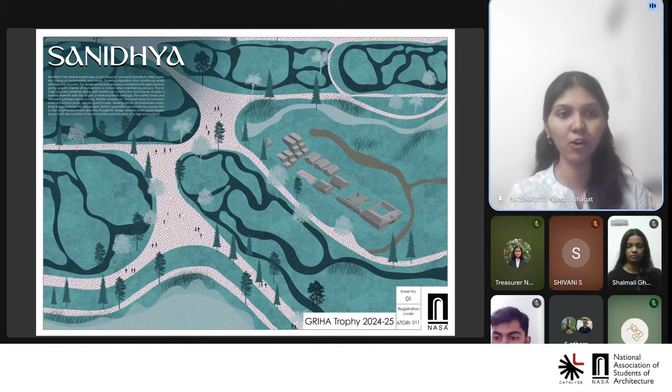The first sheet sets the foundation of our design, speaking about climate, users, urban context, demographics, and local culture. Studying these points from official websites helped us design directly from data and not from assumptions.

Finally, the form development was inspired by the Warli design. The circles were a conscious design solution to reflect togerthness, local identity, and social interaction, rather than simply keeping it as an isolated resort experience.

Thank you, Nandini, for a wonderful introduction. So as we have seen, we developed our plan form through the Warli art.

In the brief they mentioned drywall construction while developing the concept. So our concept is rooted in the philosophy of Panchabhoota, where harmony is achieved through the five elements of nature - earth through sustainable local materials, water and fire through moisture and fire resistant treatments, air through light structure, and space through open layouts.

Looking at our site plan, we divided it into three zones - public, private, and semi-private areas - and worked on the program according to GRIHA criteria, taking into consideration the bylaws and guidelines of the resort. We looked at the population density as per GRIHA criteria and took that into account in deciding the number of cottages, and for local improvement we created recreational spaces along with services provided in the admin area.

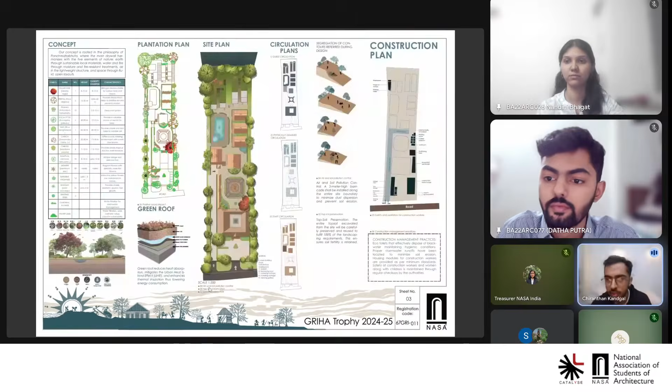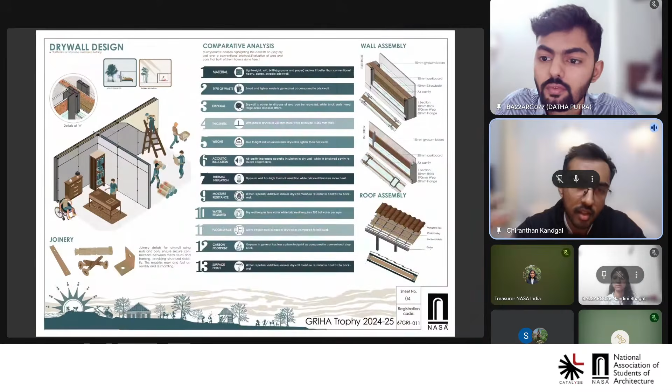Good evening everyone. As Datha mentioned, one of our core principles in this brief was to incorporate drywall in our design. So we started off by noting down the structural and non-structural components inside the building where we could use different types of drywall and their joineries.

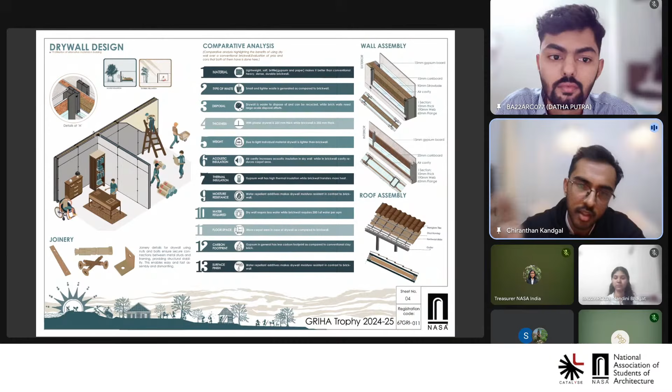We also started with shortlisting materials and how we could incorporate them in these joineries. Our approach was to perform sketches and models through which we could accurately demonstrate how each of those materials and components would sit with each other.

Through this process, we performed many experimental models, and finally decided on this wall assembly based on criteria like material, the type of waste it generates, the thickness, the weight, and the thermal insulation.

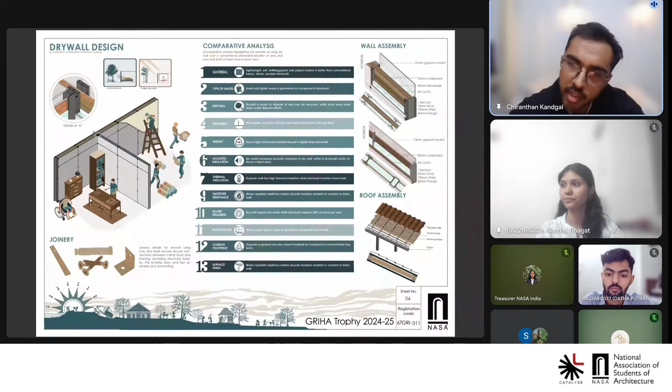So the cavity between these dry walls also increases the thermal insulation and the acoustic insulation between the interior and exterior spaces. And mainly it reduces the weight, and it decreases the carbon impact which is being produced.

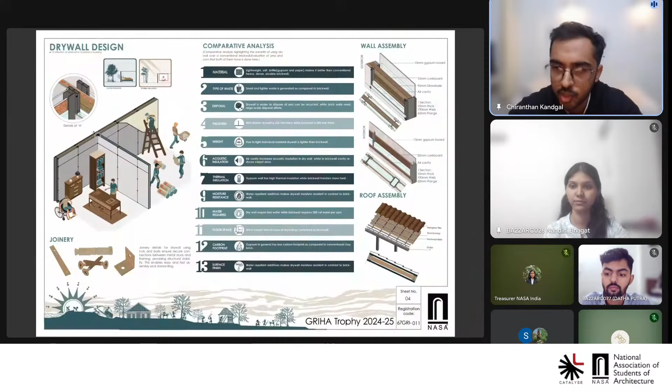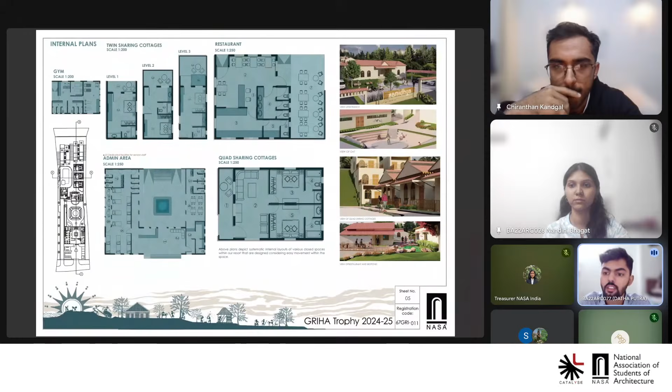We also decided on the roof assemblies with a similar process of sketching and then modeling. As per the program we discussed in the site plan, we have provided a gym and three levels of cottages in the brief to show the luxury of the resort in three levels, along with the restaurant, admin area, and quad sharing. There are some views which show the glimpse of our resort.

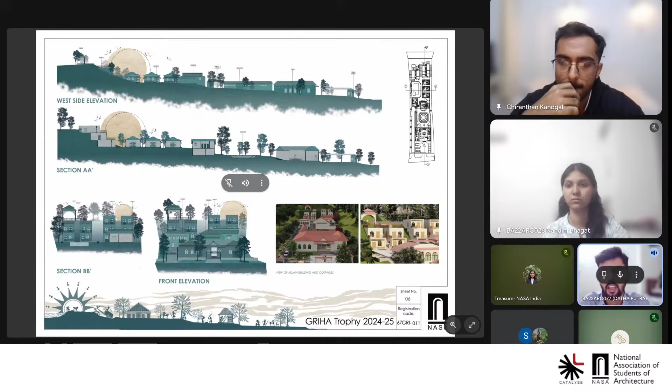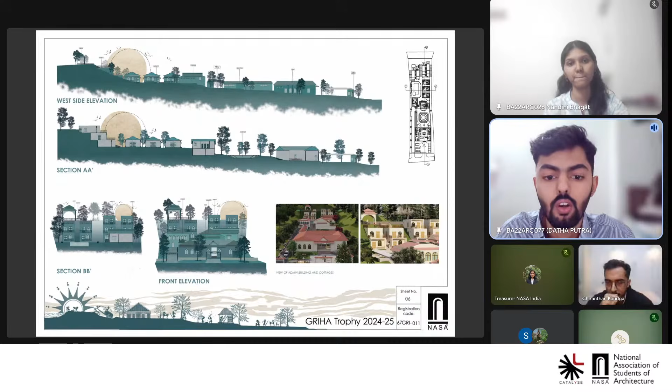In the sections and elevations, west side elevation shows how the contours have been beautifully fitted into the design. We used the higher contours for placing cottages in three different levels, considering the luxury of the resort, and also created openness on the side, providing circulation, ventilation, and passive cooling strategies. We also incorporated local architecture - seeing the front elevation, we can see the chajjas and overhangs, and sloping roofs which show the local architectural development.

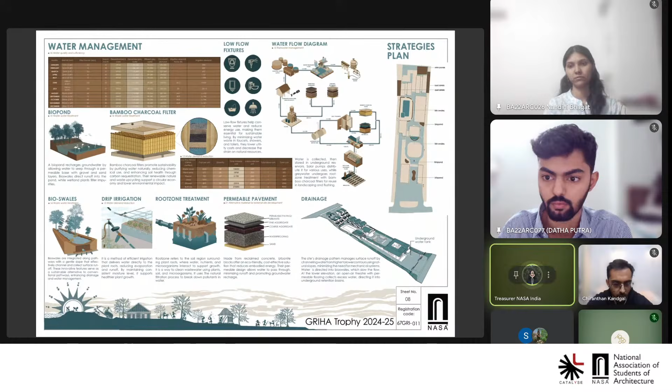Yes, Yukti. So I hope you have completed the presentation, or is there something you want to add on here?

Yeah, we would like to add on about the energy management and water and waste management in the upcoming three sheets, and then how we incorporated health and well-being, and the carbon impact.

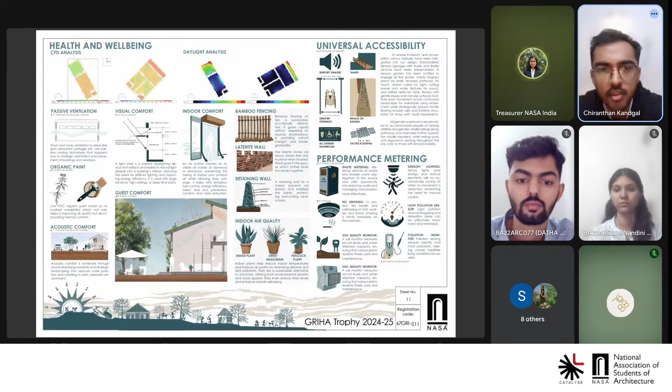Yeah sure, you can complete the presentation. I just thought since you had stopped, if there was a technical issue. I'm sorry, okay sure, no issues.

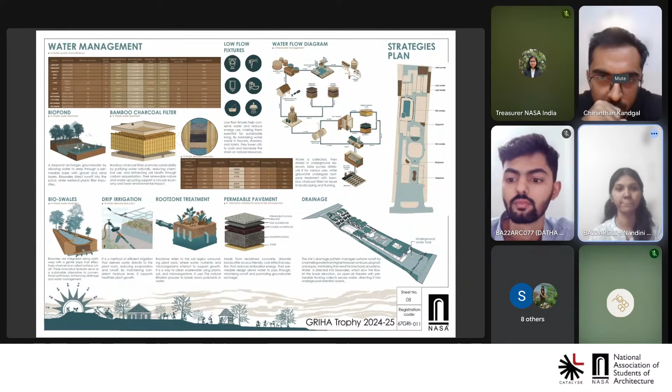Coming to the previous slide, the energy - then we went ahead with the water management, where we initially calculated the amount of water which will be required by all the users in one day, and then carried that forward calculated into an entire year.

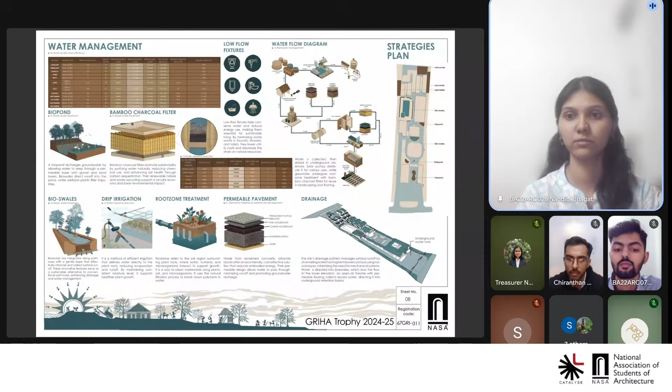To compensate for all of the water that we are using, we have also made use of different strategies such as biopond, bamboo charcoal filters, drip irrigation, and root zone treatment, just to purify all the water. We have also made sure that the water flows through a particular way throughout the site, and then is drained off with the help of the natural slope existing in the site.

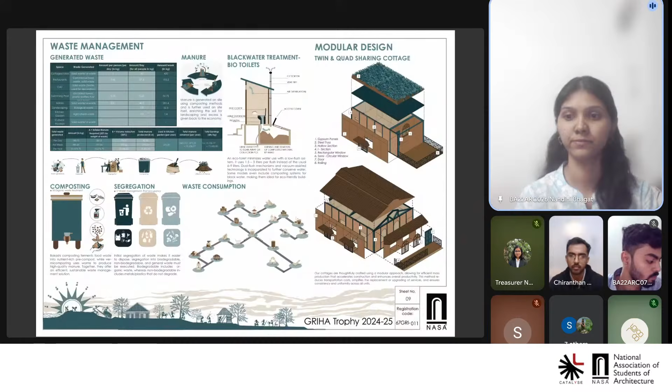Moving ahead, we also tried to take care of the waste management on the site, where we calculated the generated waste and followed the steps of composting, segregation, making manure out of it, and then reusing it on the site as kitchen gardening. Apart from that, we have also made use of different kinds of treatments to take care of the solid waste being generated on the site.

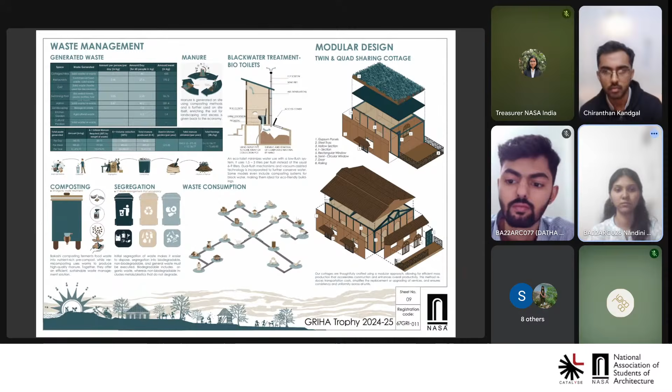Here is the modular design of the twin and quad sharing cottages that we have used throughout the design. Coming to the carbon impact part of the design, as we finalized the materials and components used in the design,

we noted down the amount of materials required in quantity and the cost of those materials, and then pinpointed the sources of the materials and where we could transport them from, so we could determine the amount of carbon impact for the transport of the material and its usage.

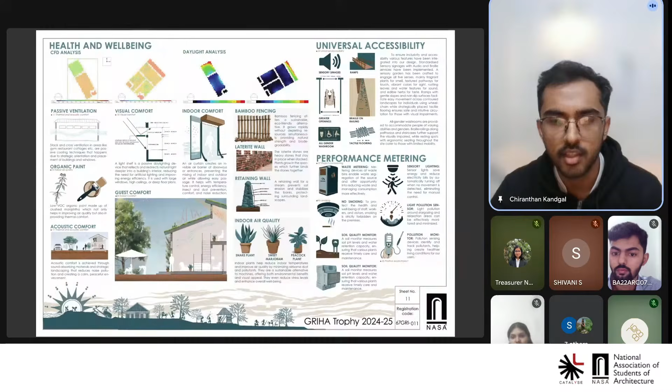So all of these performances that were mentioned could be monitored through these metering devices, which were waste metering, no smoking sensors, soil quality monitors, soil quantity, sensory lighting, light pollution sensors, and pollution monitors.

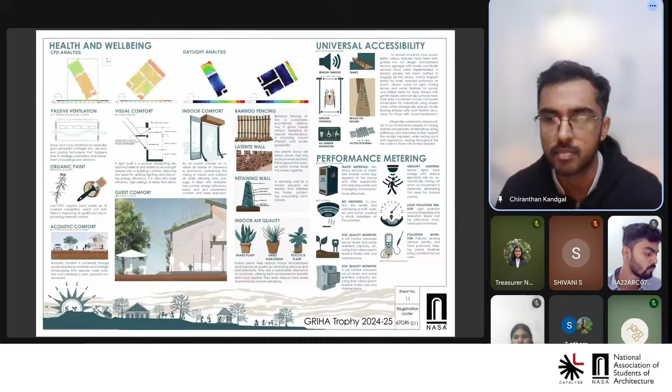Do we play the walkthrough of our design, Yukti, or no? Yeah, that'll be great if you can just show it. How long is it, by the way? Can you repeat, I'm sorry? How long is the walkthrough? It is 2.5 minutes. Sure, you can play it. Okay.

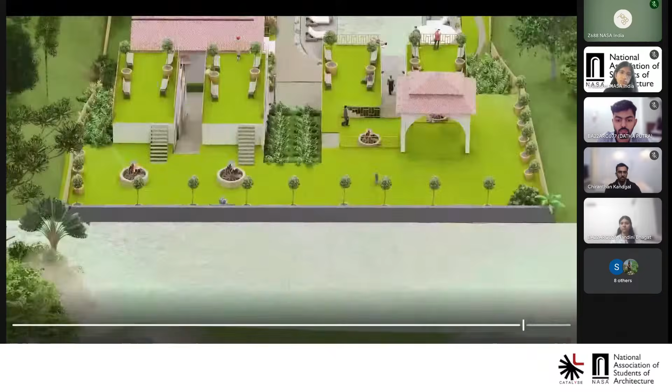That's it from our side.

So I want to ask, it says in the brief that usually drywall construction is only used for partition walls, but you need to come up with more creative and flexible ways to integrate it into the design. So how exactly did you tackle that issue?

So for this, we went through various construction techniques, like how we can incorporate drywall strongly. So that's why we came up with two drywalls, one for interior, one for exterior. The compositions of the drywalls are different, since the exterior wall can stand against the weather.

Also, for construction techniques, we used prefabrication, like 2D type of construction and 3D. For small cottages we can bring built containers to the site, and for large structures like the admin area, we used walls that can be assembled on site.

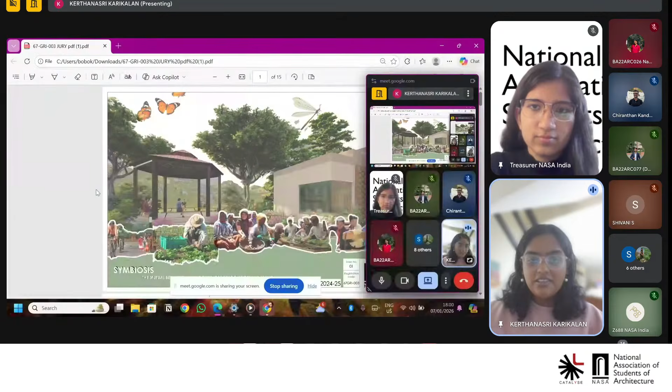Hi, I'm Kerthanasri from Z6112, and I'm here with my teammate Shivani to present our entry Symbiosis.

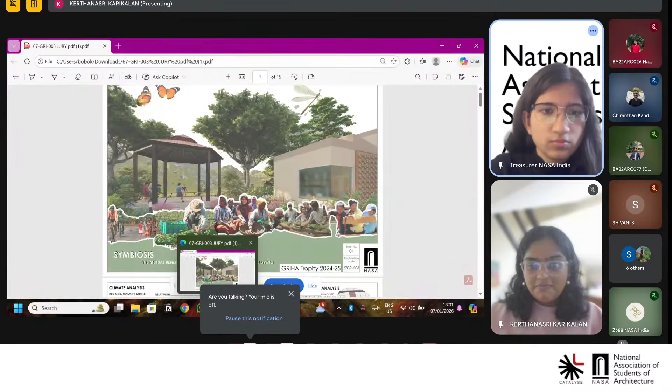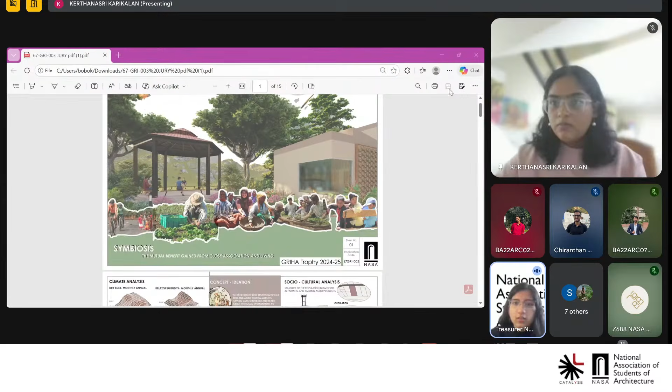You can just close the meeting window and make it full screen. The three dots in the upper right hand corner, click on that.

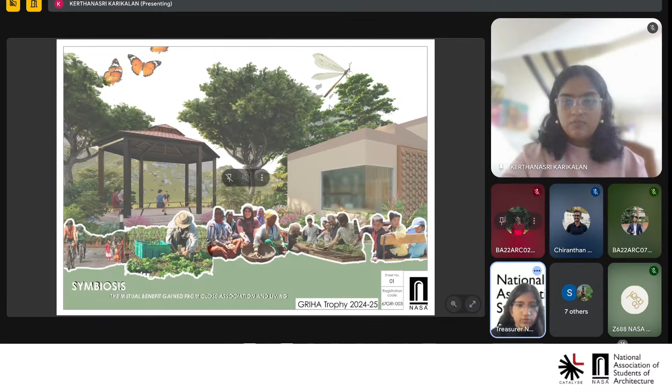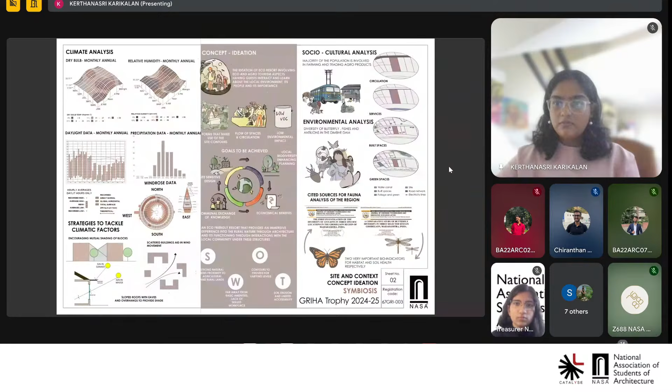Shivani, you can take over. So, firstly we started by debriefing the brief, and we got more topics to work on. We divided ourselves into two teams, one for design and the other for the analysis part.

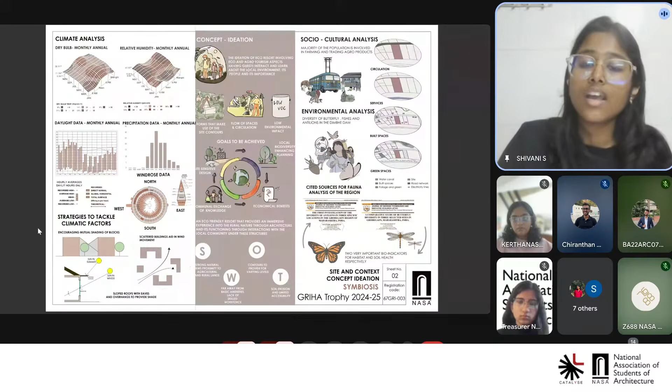Starting with the climate analysis, which covers humidity, precipitation, and daylight data, and the strategies we used to tackle the climatic factors. To the right side is the socio-cultural analysis, where we learned about people's behavior, with most involved in agricultural practices and trading agro products. Then the environmental analysis, where the major biodiversity includes fishes, butterflies, and ant lions, which we used in our project.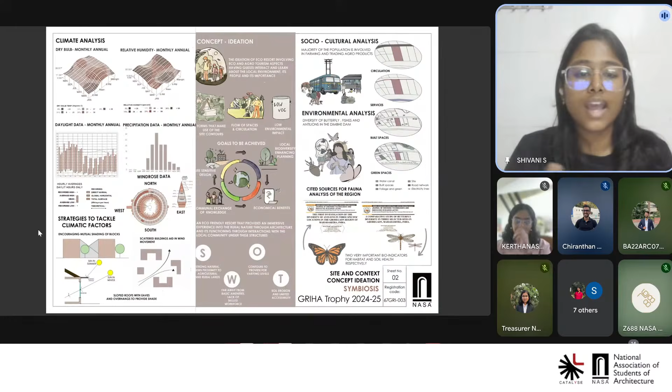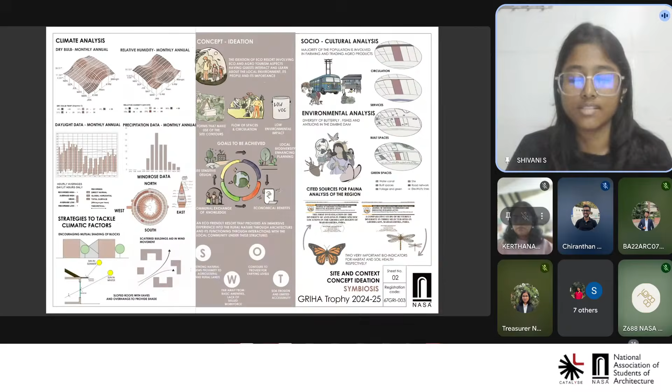Combining the climate analysis and socio-cultural analysis, we derived our concept ideation, which is all about agro-tourism — guests coming to the resort and interacting with the local environment, centered on the people and their importance. Our goals were site-sensitive design focusing on the site, local biodiversity enhancing planning, and communal exchange of knowledge and economical benefits. The major biodiversity, butterflies and ant lions, will be covered in the further sheets.

Then comes the master plan layout, starting with the bitumen road which provides access to the whole site. While doing the site plan, we separated the site into three zones. The first zone is the public access zone, with the admin building and parking area, the parking area provided with reclined brick pavers.

The second zone has the recreation and restaurant blocks, which is semi-public. Moving along the contour, there's the local produce farming area, which serves as a workshop for visiting guests. The final zone has private and semi-private cottages, along with the workshop pavilion.

The topmost contour has a butterfly deck overlooking the existing river stream given in the site context. Moving to landscape zoning, we planned a complete landscape zoning for the site, mainly with native plants, and the bottom of the site is full of water retaining plants due to our drainage system analysis, covered in the further sheets.

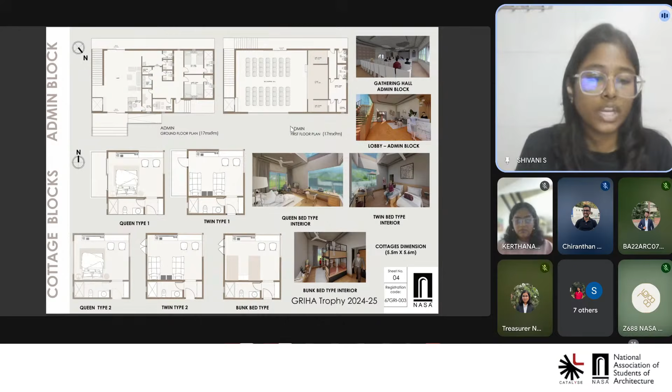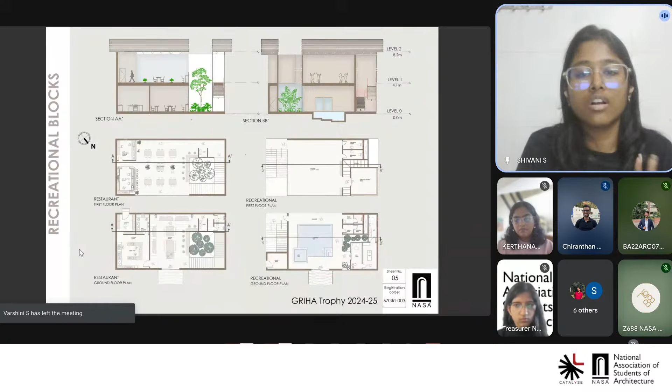The recreational block has the swimming pool and spa area at the ground level, then the physical activity area, and the relaxation area on top. These two blocks are a twin block connected under a single roof, and the sections are given.

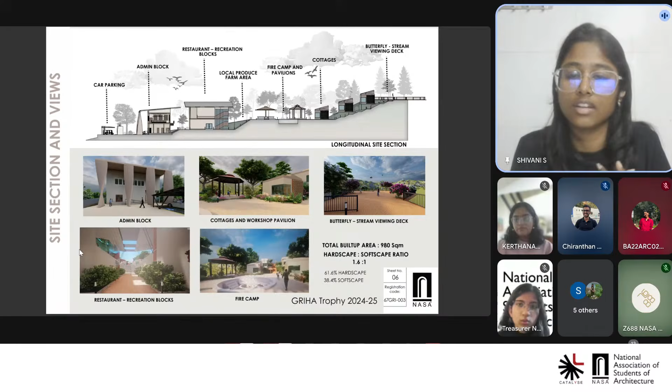The last one is the butterfly deck, which has an overview of the river down below, and it has biodiversity like previously said, butterflies and ant lions. These are the render images we are given.

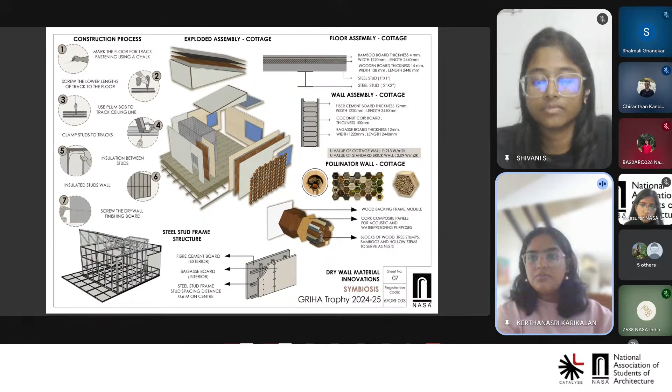A result of all that research is our composition. Right now, what you're seeing is our exploded cottage model. You'll see the floor assembly and wall assembly, which is of fiber cement, coconut coir, and bagasse. Two of these materials in particular are very unique because we managed to find factories. These two are waste byproducts, both coconut coir and bagasse board.

You compress them to form a board, and I think the sourcing of these materials is from within and around factories around the site. So I think site analysis in that sense really helped us source really unique biogenic materials for this project in particular.

Right below these two assemblies, you'll see an experimental concept we tried to introduce: a pollinator wall. My teammate mentioned our attempt to bring biodiversity into nature-based resorts and living. This is one attempt with bees becoming extinct and everything — a concept of housing solitary, non-aggressive bees, which are our primary pollinators.

This is just a wooden module, you have a cork board behind and organic material within, and these will house the bees. This is a type of concept you'll only get the chance to experiment with in these type of projects. You can't use it in a residential or an office building — this is more of a hospitality type situation, and we thought it would be interesting to inculcate this concept.

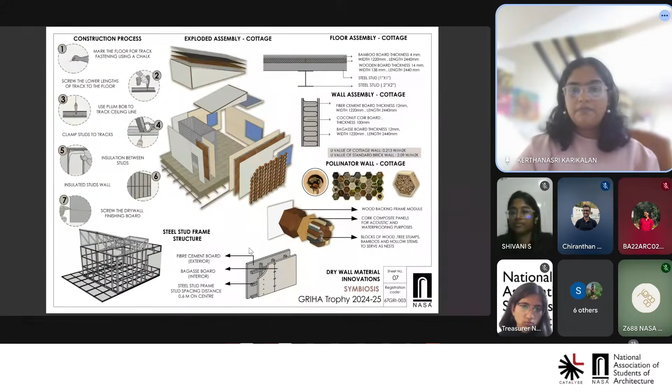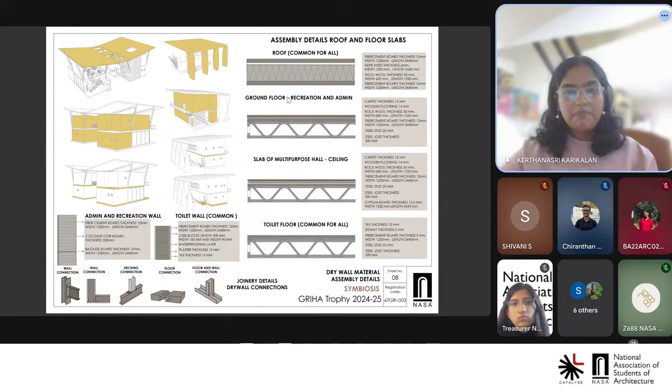Now these are your classic GRIHA standards and calculation topics. When we started doing GRIHA, we did a little homework before the brief came out, looking through previous year briefs to see what topics come up over and over. As soon as we got the brief, we had an idea of how to take this project forward and establish it into topics. So we had different teams for different topics, and one such part is the analysis.

Another topic is waste management, wherein we use three types of strategies. One is a waste compactor to compact the amount of waste generated in the resort, reducing it by about 75%. In the center, you have your biodigester, which will produce about 2.2 to 2.7 units of LPG for on-site consumption. On the right, you have vermicomposting fertilizer calculations, and we calculated that to produce about 18,000 kilograms per year. So that is under waste management.

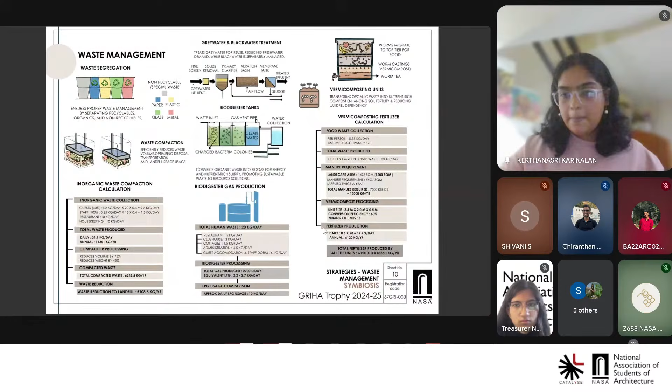This is energy optimization. Our energy generation on site is mostly through solar panels and solar water heaters, and that calculation is to the left, showing the amount produced per year. On the right, you have strategies of double glazed openings, window blinds, and a daylight analysis of our twin building format for the recreation and restaurant block, showing which areas preferably need lighting throughout the day and which don't. That type of conclusion can be derived through this analysis.

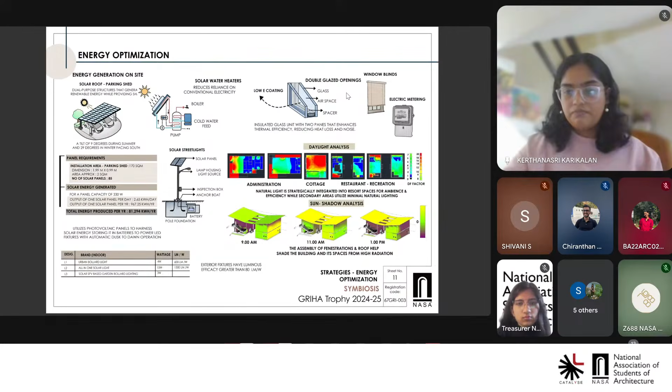This page is a calculation of the indoor fixtures used within the building and how much energy they will consume. Comparing that to our generation, we save about 8,900 kilowatt hours per year, leading to an EPI of about 73.7. So this is a net positive building overall.

I'm sorry, my screen gets stuck from time to time.

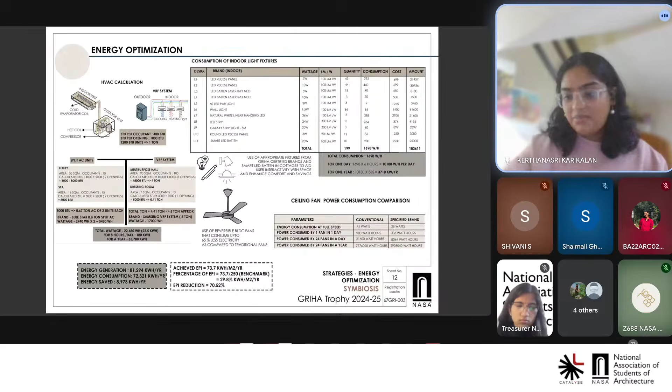Make it full screen. My screen is kind of stuck. I'll check that.

I'll have Shivani present.

Is it visible? Yes, it's visible.

Starting with the name of our project, that is Bhumija Retreat. Bhumi Ja is a Sanskrit word where Bhumi means earth and Ja means born from. So we wanted a name that reflects a resort closely connected with nature, designed in harmony with the local landscape and climate of Pune. We've tried to blend it with indigenous art forms of Maharashtra, like Warli painting, and styles like jharokha and woodwork in our design. So Bhumija Retreat itself means born from the earth.

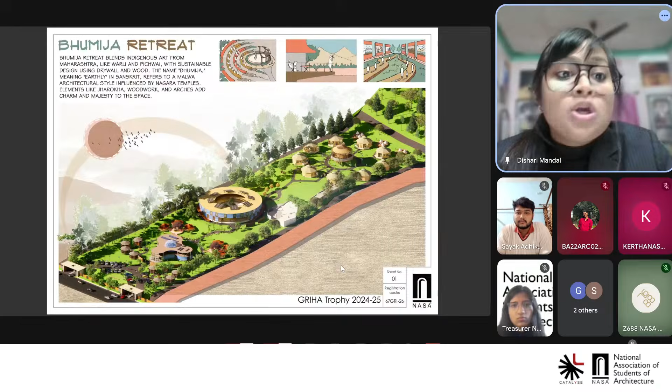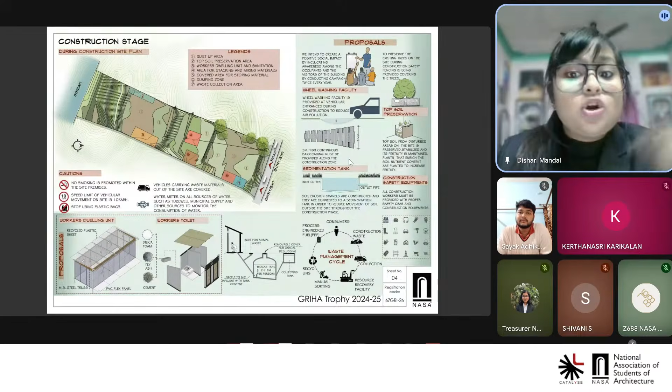The speed limit for vehicle movement on the site should be 10 kilometers per hour. Vehicles carrying waste materials out of the site need to be covered. We have intended to provide a wheel washing facility at the vehicular entrances during construction to reduce air pollution, and a 3-meter continuous barricading will also be provided to avoid any hazard.

Next is our site plan. Upon entering the site, we have two entry and exit gates, and on entering, we have open parkings. On both ends, we have security kiosks. Next, we have souvenir shops on one side and food stores on another, which will mainly attract the tourists the most. Then we have a common reception and cafeteria zone.

Along with that, we have a walking exhibition area where we can display Warli paintings and other paintings, which will obviously attract the tourists coming here. We have provided dormitories, 3 on each side, and then a clubhouse with a banquet, restaurant, and air theater.

Here we have provided seating zones. Also, in a radial manner, we have tried to provide twin cottages with a watchtower at the center, and at the rear end of the site we have provided tents for camping. In services, we have provided a root zone treatment plant, electric substation, topsoil preservation, and public toilets. So the site is basically divided into three parts: the public zone, the semi-public zone, and the private zone.

Next, these are the twin cottages and dormitories. The twin cottages have bedrooms, a common living room, a toilet, balcony, and a porch at the front. In the dormitory, we have a bedroom and living room common with a toilet and a balcony. We have provided an octagonal roof with skylights. Here are the renders, and the facade treatment is mainly done with the jharokha, placed over here, and also the Warli paintings.

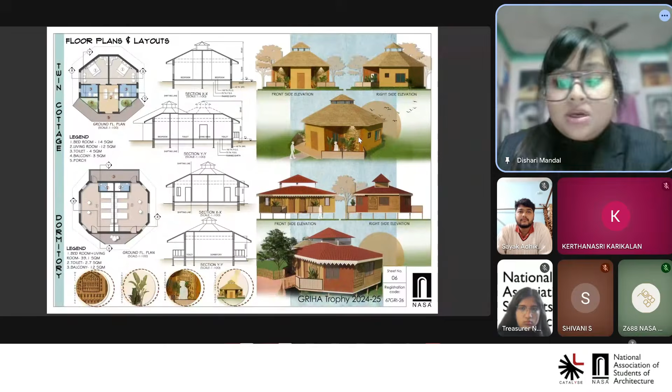Next, we have the clubhouse with banquet. It has two entrances from the ground floor, and also we have provided a circular staircase so that an individual can also access the first floor through the staircase. Upon entering, we have the banquet or the multi-purpose hall on one end, the restaurant on the other end, with a kitchen, pantry, and toilets. At the center, we have provided a swimming pool with a jacuzzi or a baby pool.

Upon entering the first floor, we have a gym space, a yoga space, a spa and sauna space for male and female, a changing room and a locker room with common toilets in the corridor space and balcony.

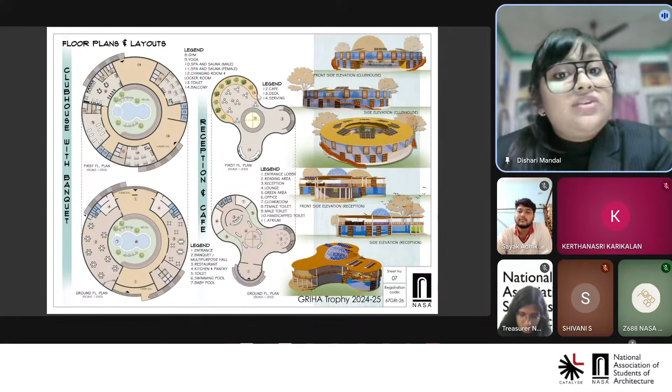And this is reception and cafe. Here we have the main entrance, where we have a reading area or a waiting lounge, a reception, a green area for plantation, the office, and a cloakroom. On the first floor, we have provided a cafe with a deck and a serving zone.

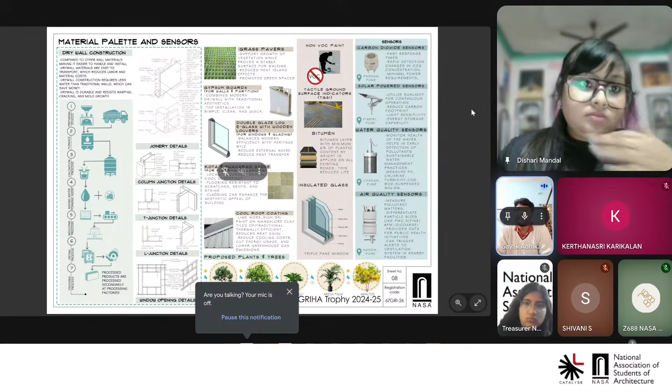Thank you, Dishari. So now moving on to the materials. One of the main focuses of our brief was to use drywalls, and to fulfill that we have used different types of drywall throughout our construction: green walls, drywall partition for HVAC room and chiller plant room, and a drywall with hollow terracotta tubes from which water is dripped throughout to convert the hot air into cool air to keep the inside environment cool. Then materials like grass pavers, gypsum boards, cool roof coating or lime roof coating, non-VOC paints, insulated glass panels, etc. are also incorporated in our design.

We have installed sensors like solar power sensors, water and air quality sensors throughout our site to make it more efficient and sustainable. Below are the few proposed plants which we have used or planted in our site after the construction.

Next, a few design strategies like using trees as sound barriers, grey water treatment, vertical gardening, or cool pavements have been used in our site. Also, the installation of kinetic tiles and outdoor solar lighting we have used to optimize the energy consumption of our site. Also, we have incorporated the organic waste management cycle to ensure proper hygiene and a clean environment through our site. We have also installed a root zone treatment plant in our site.

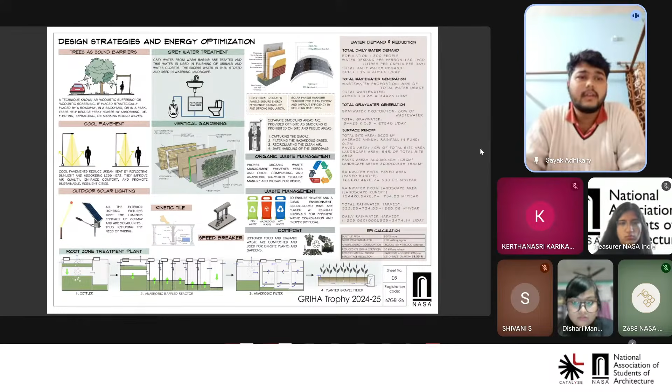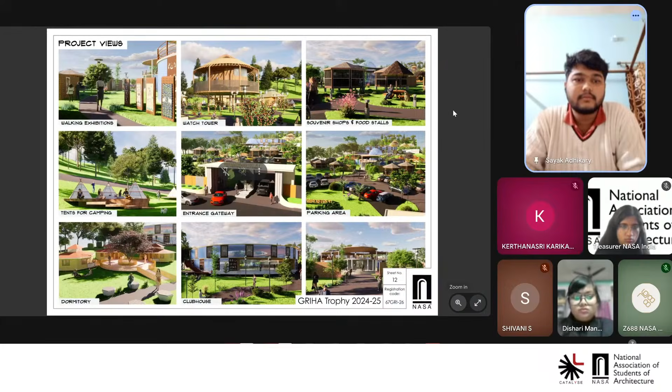This was a sheet. We have a walkthrough, so can we present? These are a few site renders also. So can we present our walkthrough? Yeah, sure, go ahead.

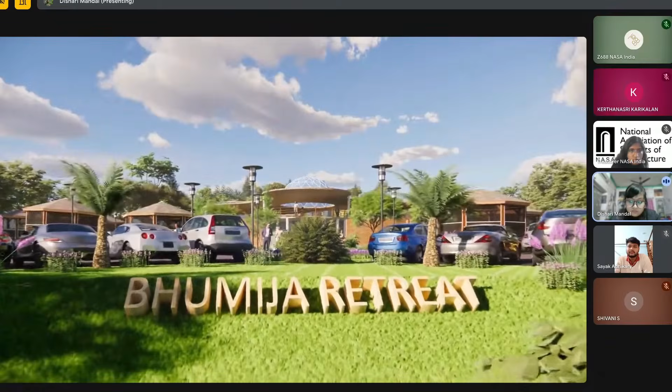Okay, I'll have a few questions for you as well. So my first question is: what do you think was the most important part of the design and the brief to crack that helped you win the competition?

In the brief, it was written that we have to construct an eco-friendly resort which will be both luxurious and blend harmoniously with luxury and sustainability. So at first, we had to crack this whole idea, because this itself has different definitions: luxury and sustainability.

So the framework initially felt challenging, but as we progressed, it helped us understand sustainability in a more practical manner. Initially, we focused more on design and presentation. But with GRIHA itself, understanding the 30 criterions and learning each of them throughout the design process, we had to think about the long term impact of a design and its efficiency. I thought this was the most difficult part to tackle at the initial phase of our design.

My next question is, what was your approach to sustainability? Did you have separate teams working on sustainability and separate teams working on design, and then design the structure and try to put sustainability on it? Or did you make the design and the sustainable part of the design at the same time?